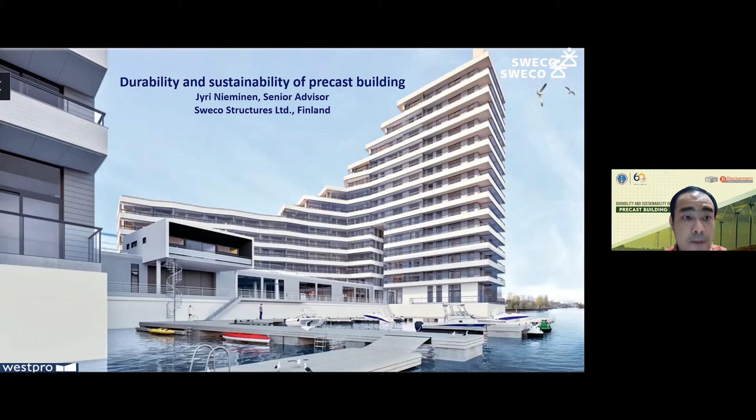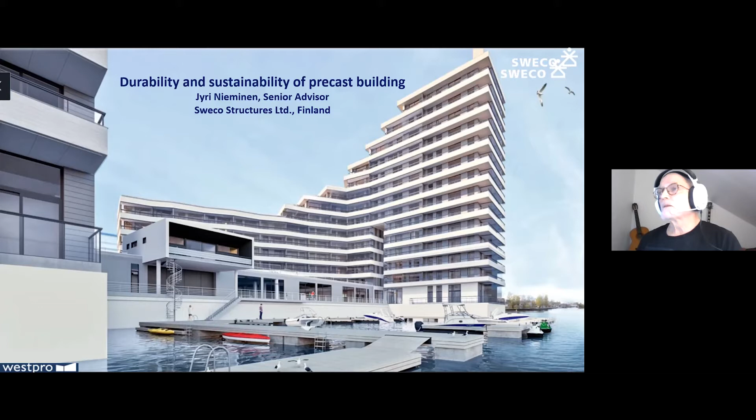To start with this building on the front page of my presentation, this is a full precast building, and it's standing on top of the sea - on piles that were driven into the bottom of the sea and built with precast components. The interesting thing is that the car park, which is under the yard deck, is totally underneath sea level, so the risk of water going into the building is quite high. But during the design phase, it was looked at very carefully to find ways and means to make the waterproofing so tight that it would keep the sea outside the building anyway.

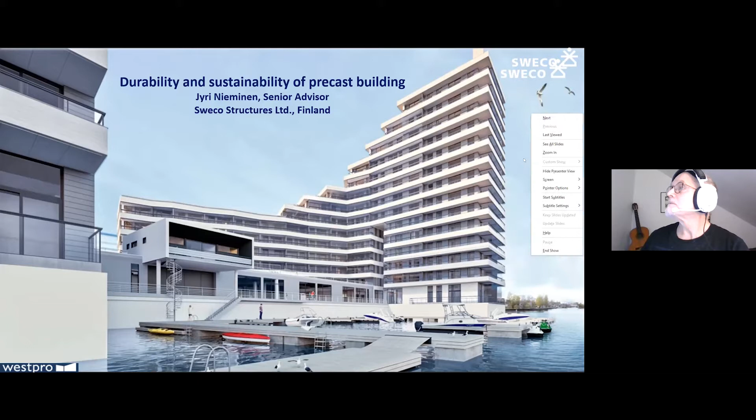Now I have a problem going... okay, this you already saw. There's a little bit of history here. Concrete construction started in Finland already in the 30s or 40s, but not as precast element structures.

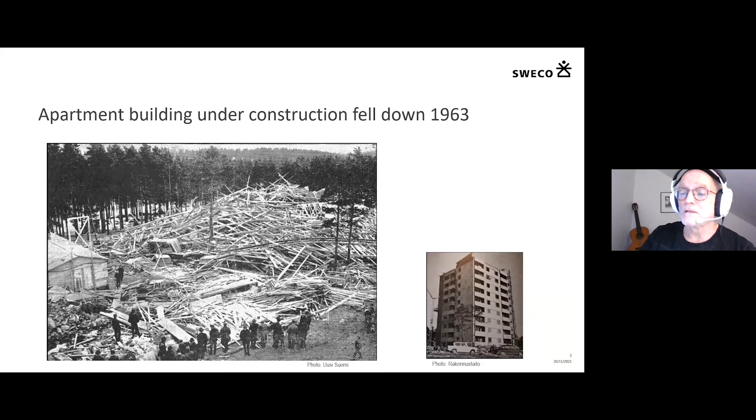This is a picture from Christmas 1963, when an apartment building under construction fell down. The reason for this collapse was that the basement structures were site-cast concrete, and it was a very cold winter - the temperature was below -20 degrees Celsius, and the concrete froze. There was a heating system for the concrete structures to keep it above zero, but it didn't help because the system also failed, or the person guarding the system was asleep. Anyway, it went down. I remember it well because I live in the city where this happened, and we went to see it - it was a very impacting pile of wood after the collapse. The building was supposed to look like the building in the right-hand small picture. They cleaned the site and built it again, but that was the accident that happened.

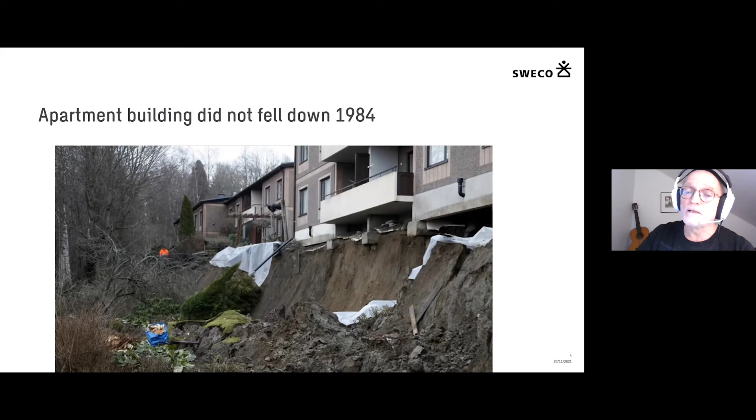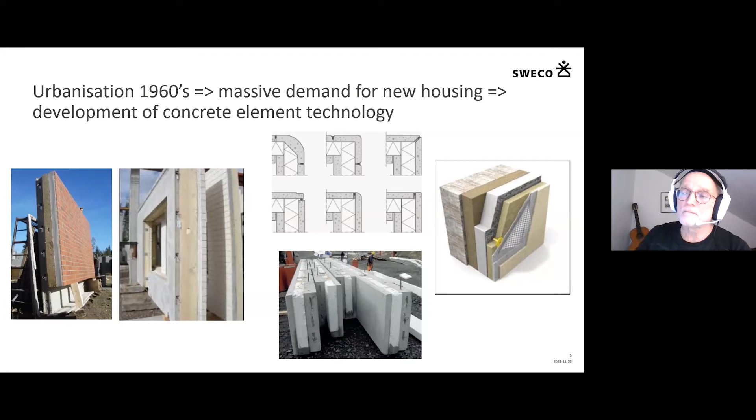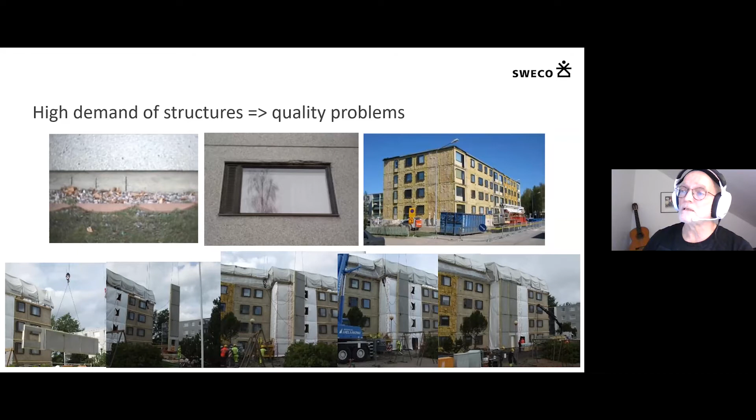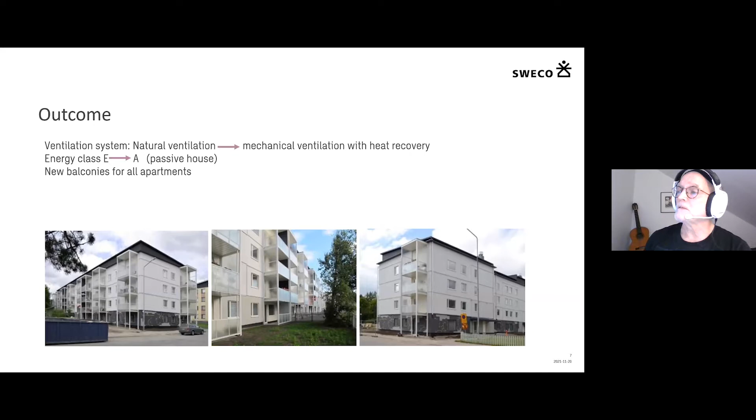This is a little bit newer building, from when the energy crisis hit Finland. People also started to think about low energy buildings or zero energy buildings. When I was working at VTT, we developed a concept for a net zero energy apartment building, and that was built here.

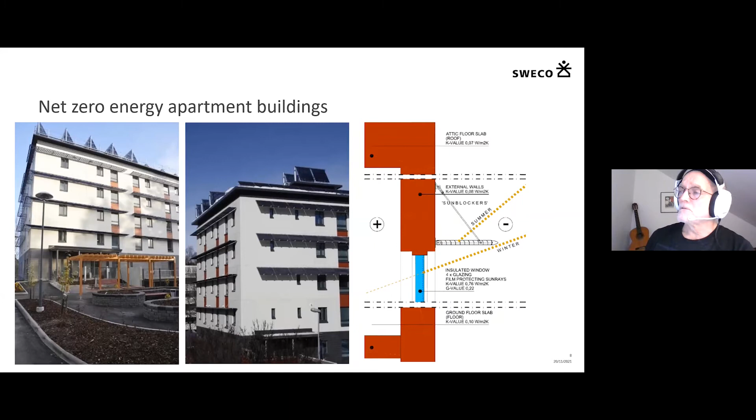The U value for the windows is something like 0.6, I think 0.5 - at that time a very new system. All the windows also have shading for the midsummer sun. In Finland during midsummer, the sun is up all the time, so you can get sunshine all through the day.

The whole building is built with very typical concrete systems that we have in Finland and have been using for about 60 years now. There was a second building - two buildings like the other one. One was for the elderly and one was for the students, a student's home as well.

These were then monitored quite carefully, and so we could state that the original target was reached - the nearly zero, net zero energy building.

It's also peculiar that one of the buildings has a heating and cooling system - they have ground source heat and cooling.

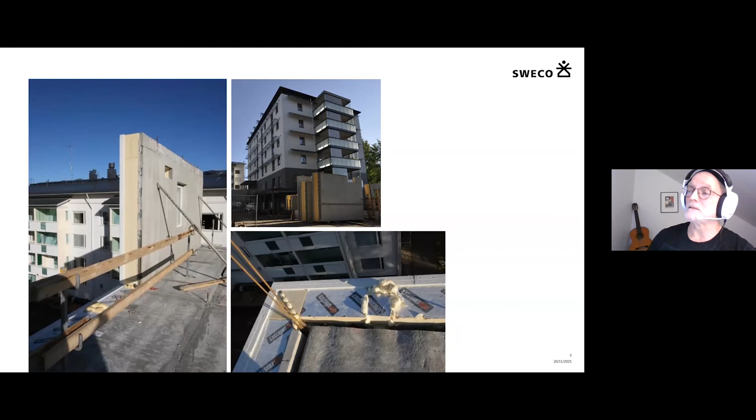I think it was the first big building having this kind of status in Finland. And this was also a building where VTT was working at that time, making the concept design and all the simulations and calculations to verify the building and its properties.

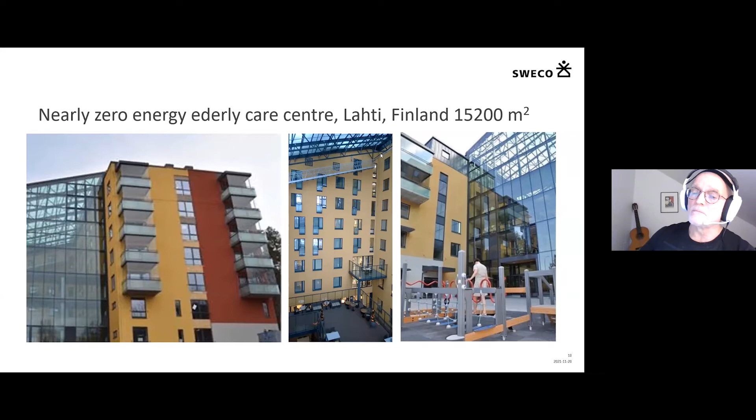Now carbon neutrality in Finland is a hot topic, and some people want Finland carbon neutral by 2035, the whole country, but that's a little bit too ambitious a goal for a country. But individual cities, like the city of Tampere, look at carbon neutrality by 2030.

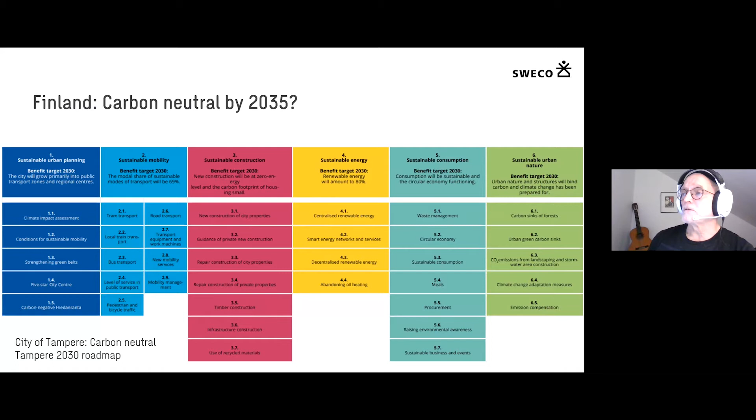And these cities have quite well targeted and created strategies for how they are going to meet the target of a carbon neutral city. These guidelines or strategies include construction as well, because that's important in a city like Tampere, since it's growing all the time. The idea is that all new buildings will be net zero energy buildings, and the city is showing examples for the people living there and also for construction industries, that this is what we want. It's very ambitious for a city to take a kind of lead in the fight against global warming.

Now the country's target is that emissions of the built environment and the construction industry will be reduced by 66% by 2035. So this is the state's and the construction industry's common target. The idea is to reduce carbon emissions by 66% by 2035, and then total carbon neutrality is looked at for 2050, when emissions will be reduced by 95% compared to the current level.

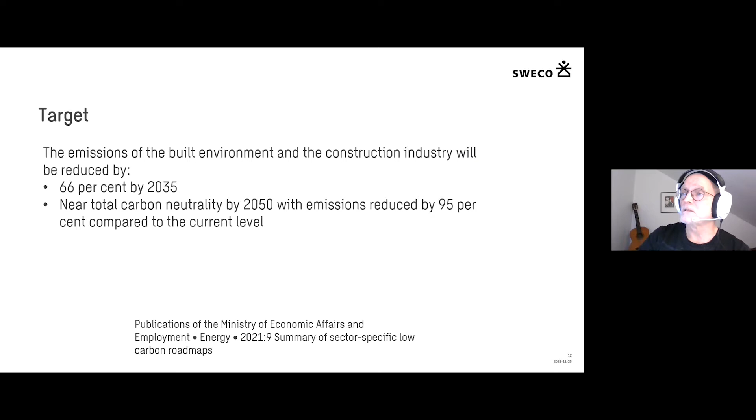This is also quite ambitious in my opinion, and there will be a lot of work needed to reach the target anyway. It looks like a long time, 2050, but 28 or 29 years goes quite rapidly if you think about it, on the basis of the history and development earlier.

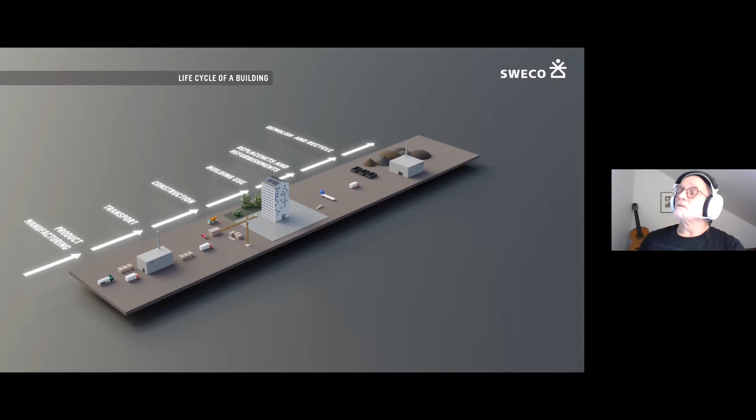And then how we analyze these things - earlier it used to be that looking at the energy consumption, or energy demand actually, and the carbon emissions, it was a kind of linear process from product manufacturing to demolition and recycling of the building at end of life. Then we had to include the energy production for every step in the process. Typically, buildings are looked at only in terms of the energy used during the building's use, as a kind of dominating issue.

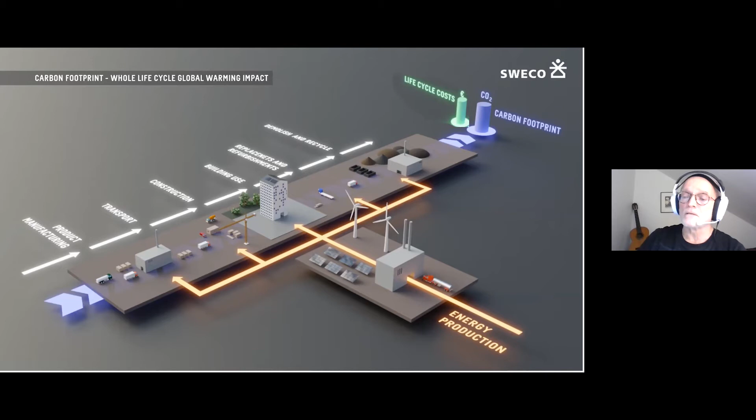But actually, we have to look at it from raw materials to demolition and recycling as well, to be able to calculate the life cycle cost and also life cycle carbon footprint. This is something we at Sweco have been developing quite strongly for some years now, for 5-6 years. So we have the tools to make the analysis for individual buildings, but we can also analyze town areas or neighborhoods, or whatever we want to call them.

And then there's also the circular economy that has to be taken into consideration, because this will reduce emissions, since you are reusing all the parts of a building as far as possible.

But the problem is that if we have a building built in the 1960s and you want to demolish it so that somebody can use the building and structures again, there's a lot of problems with the strength of the structures and also the building physical properties of the structures. And then again, there might be some problems with mold growth in the structures. So it's not very easy, but it's possible anyway. This is also something that my colleagues at Sweco are looking at - how to secure the structures that you take out from a building that will be demolished.

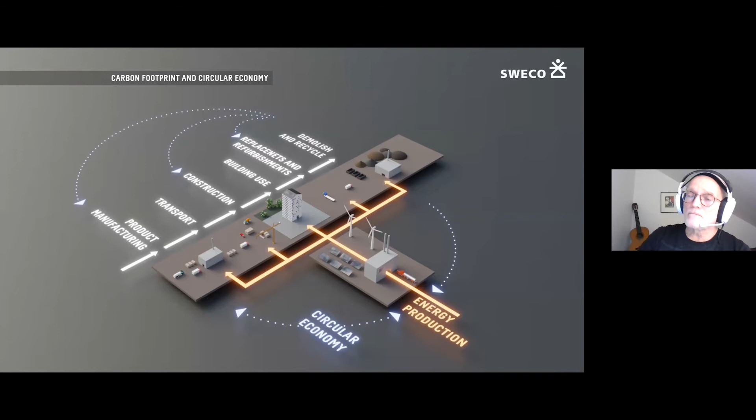So in circularity, I think there are new areas that we have to start rethinking differently than we did before. Also, I think modular design might be something that helps in circularity, so you can lift up the module in the building and lift it out if necessary.

And the building should in total be designed for reuse and optimized life cycle as well. And then something to be recycled is the bio-based materials.

I think the recycling of concrete elements is not that difficult, but the only difficult part is that you have to be sure it fulfills the requirements for human health, so that already-in-use parts of a building don't contain microbes that can be very difficult to get rid of from a building. And microbe growth is also a health issue, a very strong one.

And for existing buildings, the idea is to prolong the life cycle, meaning that you do the renovation and refurbishment, take into consideration the energy demands of the present day, and then reuse those parts that are still good, and recycle all other materials at the end of life.

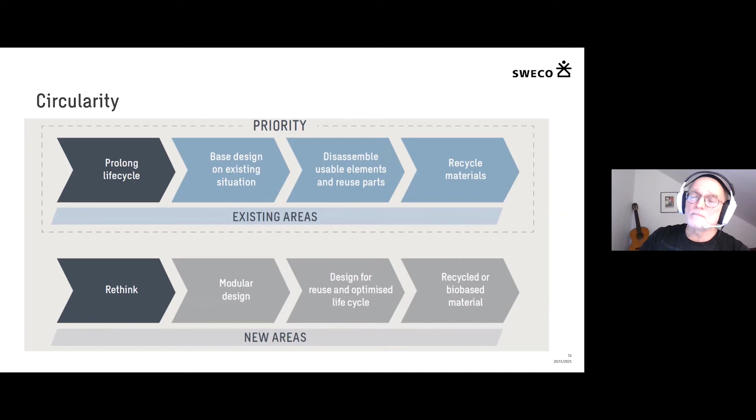There's an example of whether we should demolish and build new, or refurbish and extend the life cycle of a building. Those graphs on the left-hand side are in Finnish, but the colored area means the construction volumes from 1970 to 1989, and that was a very high construction boom during those decades.

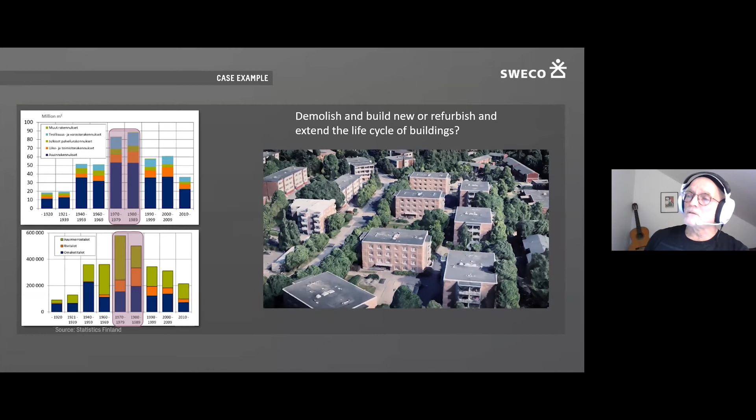On the right-hand side, you can see the area where this building is. It's a very low-rise apartment building, all concrete buildings that you can see in this video. Then we started to look at what should be done with these. So these bars here, A, B, C - A is the construction activities, B is the use, and C is the end of life.

Emissions - it's the total emissions. So if we demolish and build new, we are causing more emissions than if we refurbish and extend the life cycle of the building. And it's quite a lot, it's 20% less.

And at the same time, when we refurbish the building, we can improve the energy efficiency of the building so that it's on the same level as new buildings, or according to the present requirements for buildings and their energy efficiency.

And also the material production will have some good sides, in that we don't need so many new materials when we refurbish compared to when we are going to build a totally new one.

And of course, in a refurbishment, you have to be able to use the existing load-bearing structures, because if you have to change those, it will then be almost the same as building totally new.

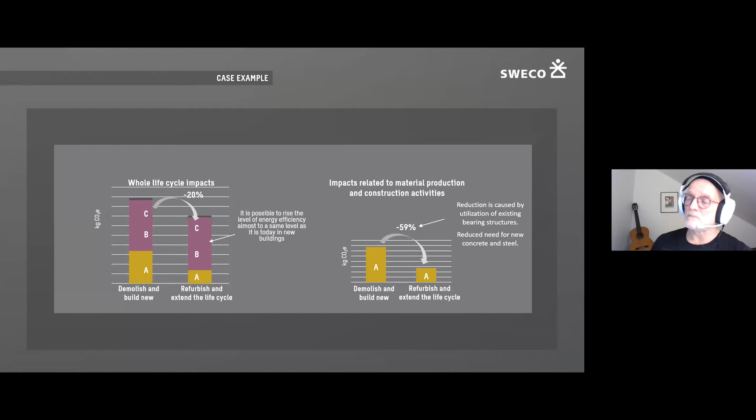So another example - we made a comparison, not us, but the Housing Finance and Development Center of Finland. I remember it was Sweco who did this analysis. There were two similar buildings with the same architecture and same type of apartments in the buildings. One was designed as a concrete building and one was designed as a wooden building.

There were a lot of similarities, because all the underground structures like deck, garage, architecture, indoor spaces, windows, doors, heating, ventilation systems and so on, and also household equipment, in the analysis were considered to be the same in both buildings. And we estimated that the simulation would take 100 years, so the expected life cycle of a building here is 100 years.

And then the analysis used the European norms. For the carbon footprint calculations, we used the Finnish tool One Click LCA, but also the LCA-EN system, which is commonly available in Europe. One Click LCA is very handy because there is an all-the-time renewing library of properties of different materials and different systems, so it's easy for a designer to use to make this kind of analysis.

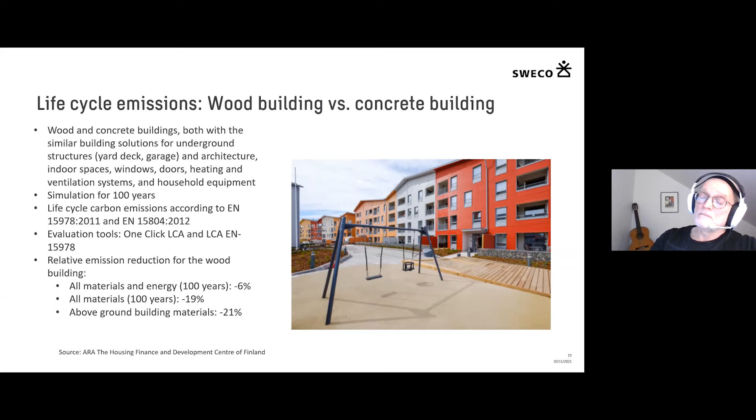The emissions from concrete, this is a funny thing. I found this is from Unilever, which is a food product producer. And if you look at the emissions from concrete and cement, they are in the same level as potatoes or beer.

Of course, the problem is that we are using concrete so massively, and that's why the emissions of construction are so high. I never heard that anybody counted how many people it would require to drink beer as much as we use concrete in a building, to kind of have even emissions.

But then again, this pie here shows that 70% of all the emissions are other emissions which are not related to construction itself. And for building materials, it's only 5%. So, and concrete is inside of the 5%. Site operation, transportation is one thing also, and then consumption during the use of the building. So we are talking a lot about concrete and its emissions, but actually in the big picture, they are not so high. There are other things that are much higher than the building materials.

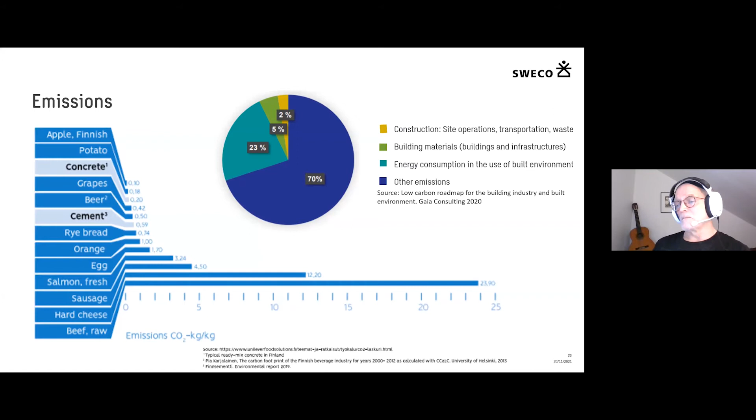So there are ways and means how we can, in a way, improve the image of concrete, which are not considered in the public discussion so much.

Nevertheless, there are also cement manufacturers who have already now reduced the emissions from cement production by 50%. And that work is going on, I think, everywhere nowadays. They want to have a greener concrete compared to what we have now.

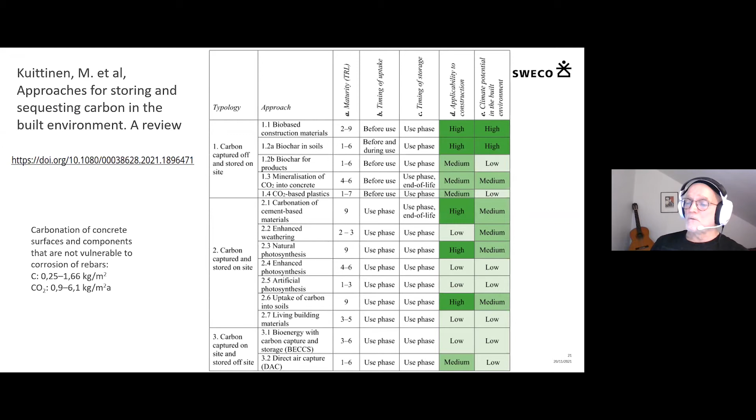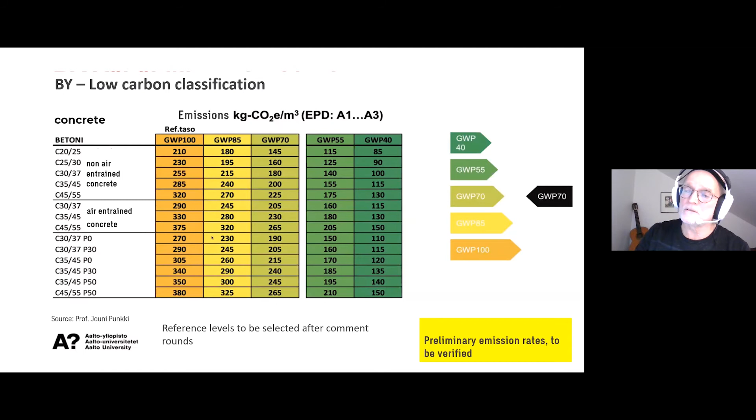It's actually a question of what kind of energy you're using in the cement manufacturing. If you can make the energy green, then you have also a greener cement that you're producing. Of course, there are other emissions, but the energy use is the key issue.

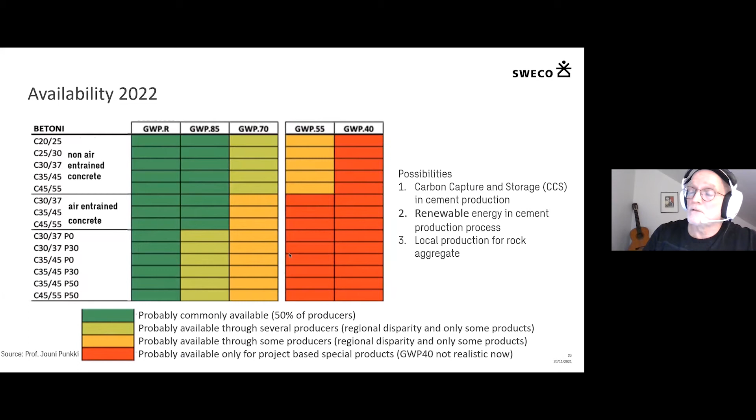This is one of the systems that the concrete industry is developing to make concrete more affordable and more interesting to all the builders, architects, and so on. Of course, it's very affordable now, it's very cheap, actually, but nevertheless it has to be greener in the future, and this work is looking at that.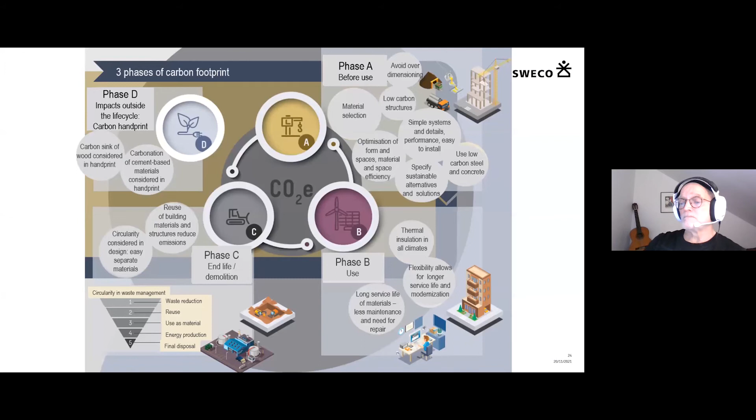So I read somewhere that David Fernandez was also a speaker in one of the earlier sessions. I don't know if he showed this system called MIVES, which is a requirements tree, how to analyze the requirements for the building so that you can see the outcome of the coming buildings.

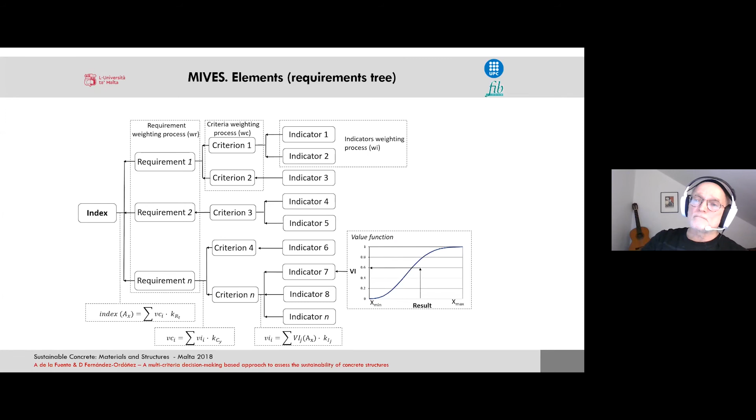So this is a system where you put certain issues like economic, environmental, social impacts, and then you give kind of indicators to each of those. For instance, economic is the cost and time; environmental is emissions, energy, and materials; and social is size, safety, and third-party effect. This kind of tool has been used earlier as well, but this one is now exactly for concrete, to look at the total sustainability of concrete buildings. So it's not just the material, it's looking at all the buildings, all the issues related to the building.

And this work has been done in the FIB group 6.3, sustainability of structures with precast elements, where I'm also participating, and my boss at Sweco is also participating. But this looks good to me, because on the environmental side, the emissions have the largest impact here.

But the idea of the tool is that you can change those. These percentages are not fixed, and you can change them. And that is, in my opinion, a little bit dangerous, because then you can use suitable percentages, not the real ones, and that might lead to good results that aren't genuine.

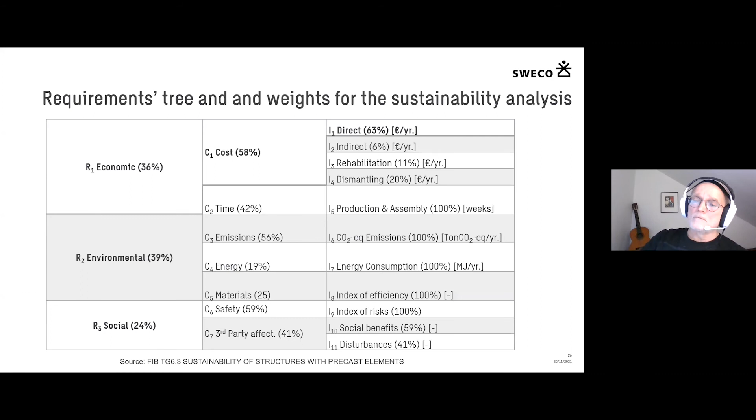So I would disagree with these numbers. We know that concrete manufacturing up to now causes a lot of emissions, especially cement manufacturing. So we should not give values that are under the reality. We have to keep the system so that it is acceptable, so that nobody looks at this as just greenwash, which might happen if you are using too good values in a system like this.

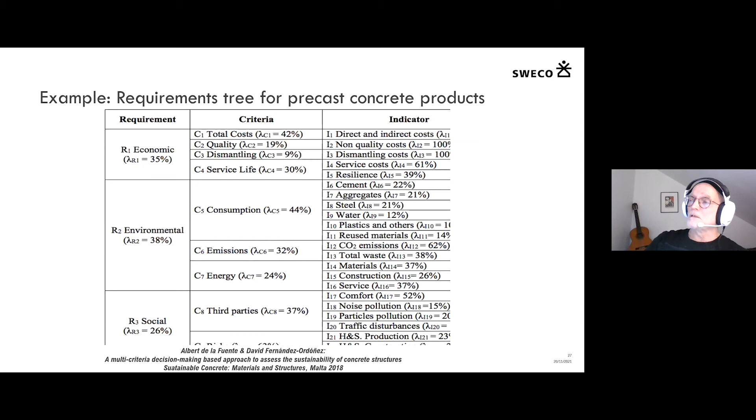And that was my presentation. Thank you.